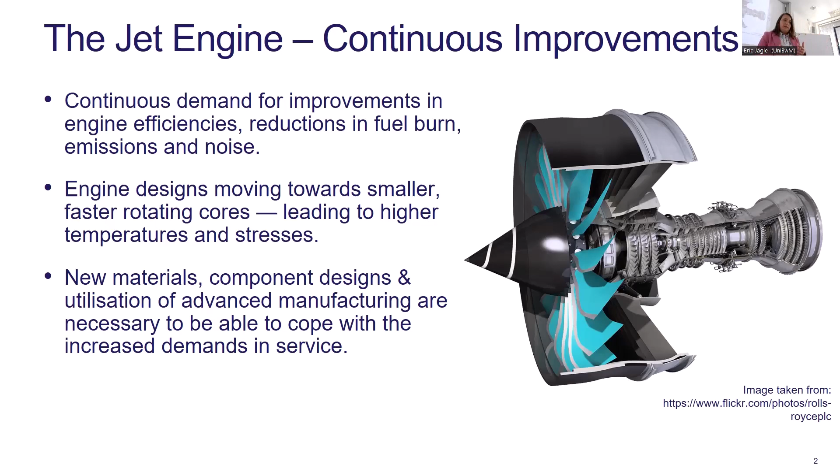And if we look at a quick cross-section of the jet engine and where the different materials are being used, this is about 20 years old, and you'll see at the front of the engine, we have quite a lot of titanium. It's nice and light, we like it, but it doesn't have the temperature capability. So as we move through the engine to the higher temperatures, we increase the amount of nickel that we use. So the new concepts of engines that we're looking at now have that nickel-based superalloy red section coming further and further front, right, as the temperatures are increasing.

And that is both good and bad. It means we need to completely change the makeup of the engine, it makes it a lot heavier. We're looking at increasingly more complex chemistries of nickel-based superalloys. So if we can use manufacturing to help us semi-artificially reduce those temperatures in the component, we can create a better makeup for the engine in terms of lightweighting and the complexity of the chemistries that we're looking at.

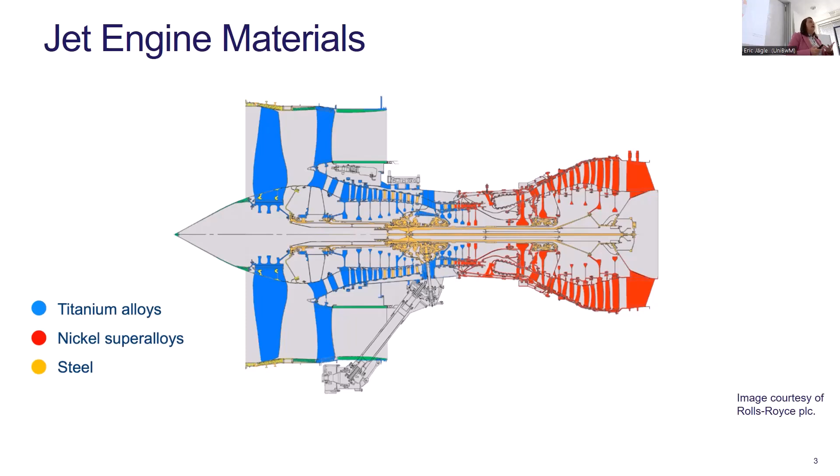So very briefly, nickel-based superalloys, if you're not familiar, primarily consist of two phases. The gamma phase matrix, which is an FCC nickel-based solid solution. We like it, it's nice and ductile. It has low rates of self-diffusion, so its creep is quite good. It has good solubility for lots of different elements, so we can tailor it quite nicely. But we can supercharge those properties by using the precipitation of the L12 gamma prime phase, which is a Ni3Al ordered intermetallic. And using that, we can increase the temperature capability and mechanical performance significantly.

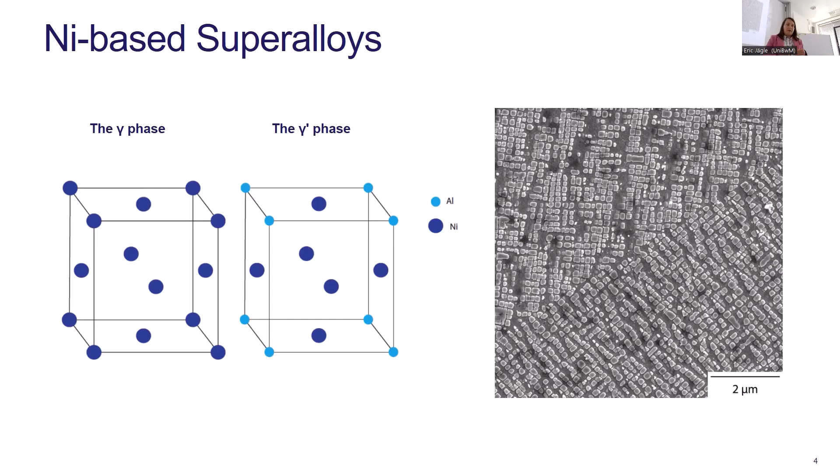Now, what does that mean in terms of additive in aerospace propulsion? As I said, if we can use advanced manufacturing, we can access much more complex geometries. We can introduce much more complex cooling than we were able to with alternative methods. We can reduce the number of parts that we need and the joining and fastening, and we can reduce the lead times for component manufacturing since we don't need as much post-processing.

But when we start thinking about the material that we're using in that, nickel-based superalloys are particularly problematic in that the higher the volume fraction of the gamma prime, which is the strengthening precipitate, so what we use for the mechanical performance and the temperature capability, the worse it is for additive manufacturing.

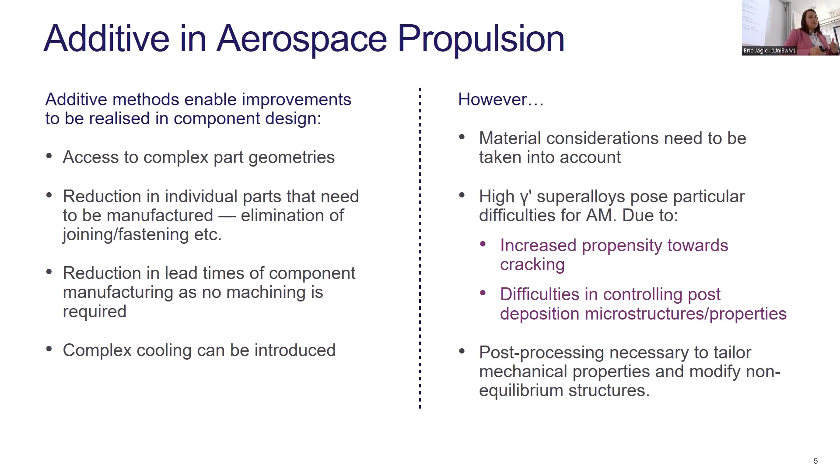So we have increased propensity towards cracking, and we find difficulties in controlling the microstructure the higher the gamma prime content as well. But post-processing is necessary to tailor the mechanical properties and modify those non-equilibrium structures as well. So there's a lot of challenges still, and the more materials we look at, the more challenging it gets.

So in this particular work, we were looking at Haynes 282. This was an alloy that was developed for a combination of good creep resistance, thermal stability, and weldability for applications in a range of temperatures from 650 to about 930. And one of the reasons that we were interested in Haynes 282 is that it has a fairly large range of temperature capabilities at a fairly controlled and low fraction of gamma prime.

So our gamma prime fraction is controlled to about 20 to 30%, and the microstructure is optimized through heat treatment. So traditional cast and wrought Haynes 282 uses a super solvus homogenization at about 1150 degrees Celsius, followed by 1010 degrees Celsius for 2 hours to precipitate the M23C6 carbides at the grain boundaries, and then 788 degrees for 8 hours to optimize the gamma prime distribution. So quite a complex post-processing heat treatment for a nickel-based superalloy.

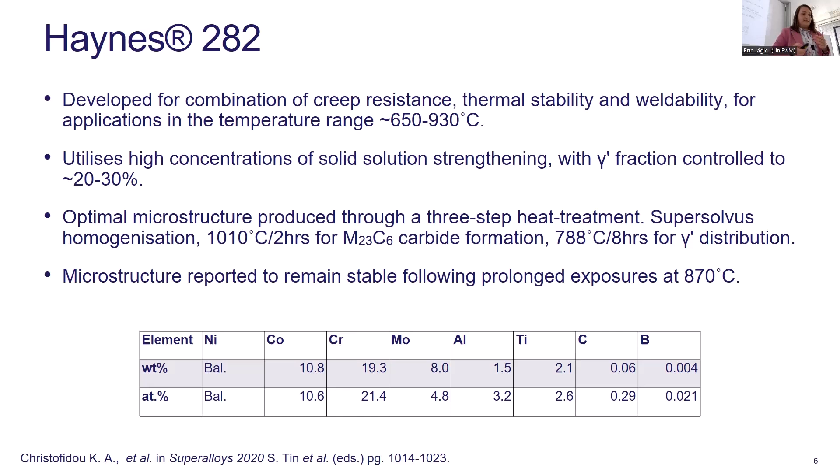And the microstructure is actually quite stable. So we don't see the formation of deleterious phases like TCP phases or excessive growth of the gamma prime either at temperatures over 870. And really looking at the composition of the material, it's quite remarkable that it doesn't do that. When I first looked at it, I was convinced it was going to be horrendous for stability, but it isn't. It's beautiful.

So in terms of additive manufacturing of this material, at the time we were doing this study, there was very little on the additive manufacturing of Haynes 282. It was primarily just a few studies using electron beam melting. Since then, there's been a few more, but I'm bound by industrial clearance processes, which means that I can't update slides very easily. So we're sticking to the few studies that were available at the time.

And one of the key things that was identified was that the microstructures, but particularly the carbide distributions, were quite different from the cast and wrought to the additively manufactured component. So one of the key things was the MC carbide and the M23C6 and where and how it precipitates through the material. So in this study that I've included here by Unocic, we've got a couple of different heat treatments.

On the left is the two-step aging that's recommended by Haynes, which results in some large titanium-rich MC carbides with M23C6 at the grain boundaries. And what they were looking at was how they can influence that or achieve that without having the multiple steps. And what they found was actually they can just create a very similar microstructure with just 4 hours at 800 degrees Celsius.

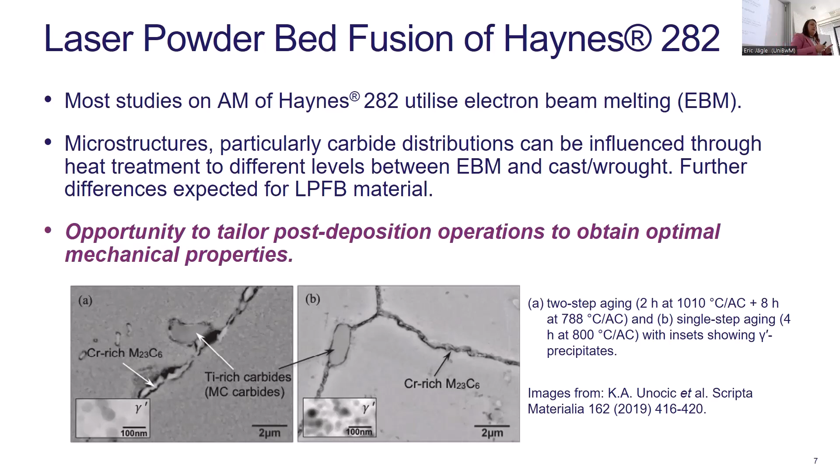So that suddenly changes a lot of the dynamics of our microstructural optimization. So that gives us an opportunity to actually tailor the microstructures using post-deposition operations to obtain optimal mechanical properties, rather than just looking at the build alone.

So what we did, we built a bunch of Haynes 282 samples using an EOS M280 instrument from virgin powder up to sizes of 45 microns. The build parameters were kept constant for the samples, but I can't share them. Even if I wanted to, I don't actually know them. I was bound by this confidentiality again.

So we had a few different coupons. So we built 30 by 30 millimeter squares by 1 millimeter thick samples that we did the microstructural characterization on. And then we had small bow tie specimens that had a 1 by 1 millimeter squared cross section by 20 millimeters sort of gauge length.

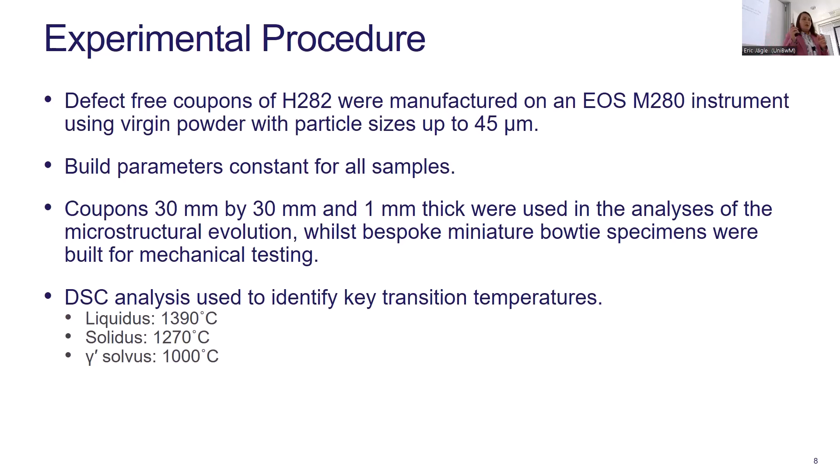So we're looking at equivalent microstructures in terms of thickness to what we're testing. We did some DSC analysis to help us identify some of the key transition temperatures for the material and then design our heat treatments from there. So the liquidus of the material was about 1390, the solidus 1270, and the gamma prime solvus was at about 1000 degrees Celsius, which helps just pinpoint a few things.

So the first couple of heat treatments were what we call the industrial ones. So we sandblasted the samples. This seems to be a standard thing for the surface finish for this particular application. And then we had the 1150 degrees Celsius for 1 hour solution heat treatment or homogenization heat treatment. So the first heat treatment is just that, just the solution, and then we have the two-step aging attached to that for the second one.

The rest of the heat treatments were lab-based ones, so we encapsulated all the samples in quartz tubes, and we heat treated them in lab furnaces under a range of different conditions. So you'll notice that we have a much higher solution heat treatment, and we played around a little bit with the solution heat treatment, and I'll come to that in a second why.

The other thing that we did was look at the intermediate aging step. So the current Haynes 282 recommended for cast and wrought is super solvus, super gamma prime solvus, whereas we looked at a couple of heat treatments sub-solvus to see what that would do to the material and its properties. And then we kept the gamma prime optimization to 788, just because that seems to work quite well anyway.

We did some microstructural characterization after each of these steps, and we did the mechanical testing on an electrothermal mechanical testing machine. Effectively, we tested tensile at 900 degrees Celsius at 10 to the -5 strain rates, and we did some creep testing that we tried to get about 100 hours lifetime from, so we were using data from the existing literature. So that was 900 degrees Celsius at 120 MPa.

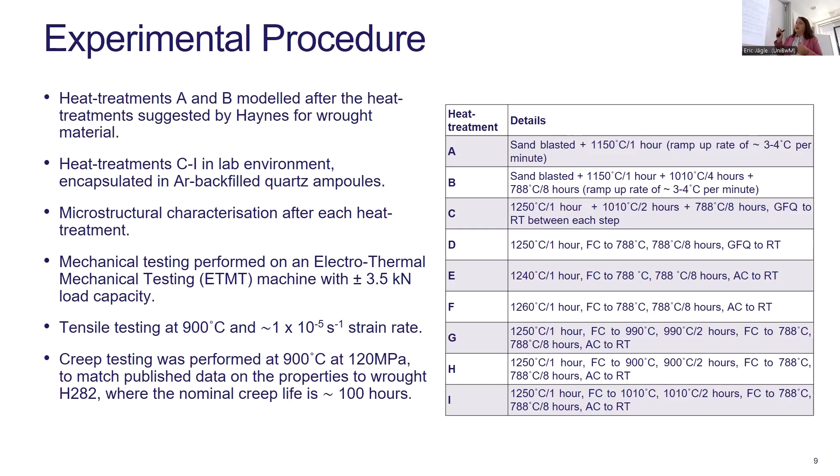So looking at the microstructure to begin with, if we concentrate on the first row of microstructures, the first thing to notice is that the conventional wrought heat treatment doesn't actually lead to recrystallization. We keep the highly misoriented cellular structures that we might expect from the deposition. We don't see much difference from the as deposited to the solution heat treated. We can start seeing the precipitation of the M6C carbide, just tiny little black dots at the grain boundaries.

And then following the two-step aging, what we see is M6C, the bright phase there along the grain boundaries is a molybdenum-rich M6C carbide. And in between that, we've got M23C6. Importantly, we don't see any MC carbides, so no MC or carbonitrides of any sort, monocarbonitrides of any sort, which is quite common in both the E-beam material and the wrought material.

The second thing to notice is the recrystallization. So as I said, in the traditional 1150 degrees Celsius homogenization, we don't get recrystallization. So we played around with the temperatures for the recrystallization to see when we would actually induce it, because that was quite an important factor for us. And what we found was that recrystallization needed an hour at 1250 or a couple of hours at 1240. And we looked at different compositions for that, with different durations for that as well.

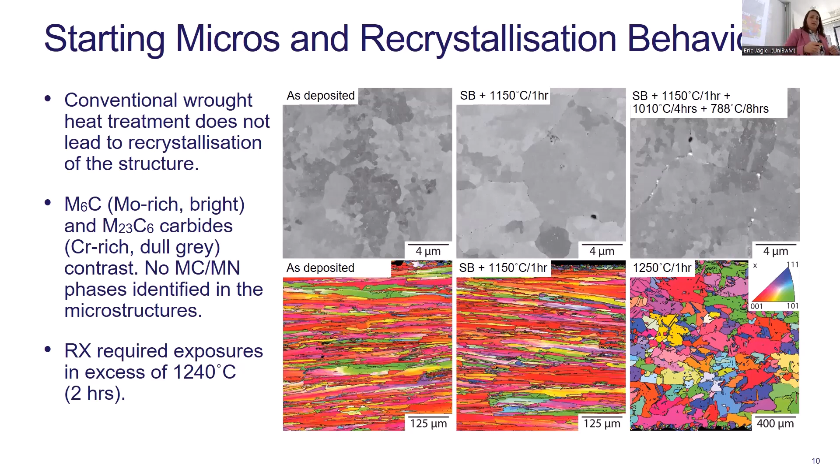So the main thing was that we were looking at recrystallized material before we were looking at the intergranular microstructures. So I'm going to ignore the first two that didn't recrystallize for the rest of the talk. I'm just going to concentrate on the microstructures of the rest.

So the first heat treatment C, which was basically recrystallized, the two-step aging as normal, and then gas fan quench, so quick quenching from temperature. You can see a very, very fine structure for the gamma prime, and then we have carbides along the grain boundaries. So that was the one that was mainly different, just because it was the only one that we quickly cooled. Everything else has equivalent furnace cools.

So we see the carbides precipitating in very similar structures. So we don't see a huge difference in morphology for the carbide species, but the carbide species are M23C6 and M6C. We don't see anything else coming out in any of them. The key difference that we see is the tertiary gamma prime. So if you look at probably this third one here and the fourth one there, you can see around the grain boundary, we have the tertiary gamma prime coming out.

Yeah. So the only two heat treatment conditions that we didn't have it were the ones where we had the second heat treatment stage subsolvus to the gamma prime. So you can see in this one, for example, growing of the gamma prime around the grain boundary, but a distinct lack of tertiary gamma prime coming out. And the reason we wanted to have that was later on when we were testing the creep, to see if that had any effect on the properties.

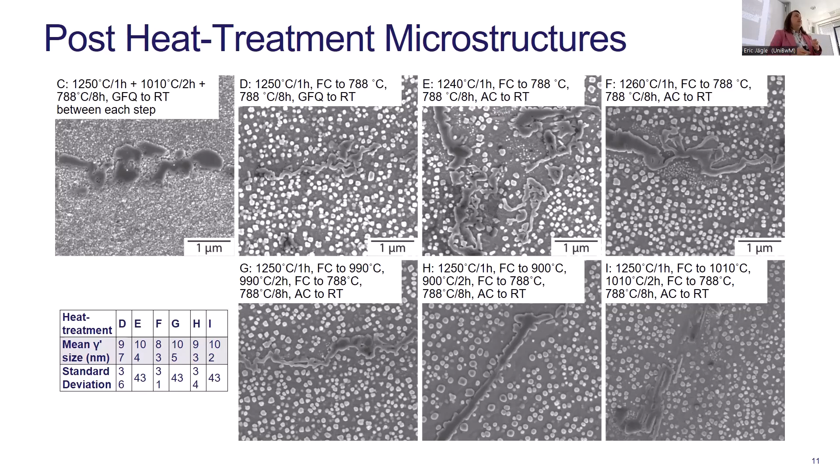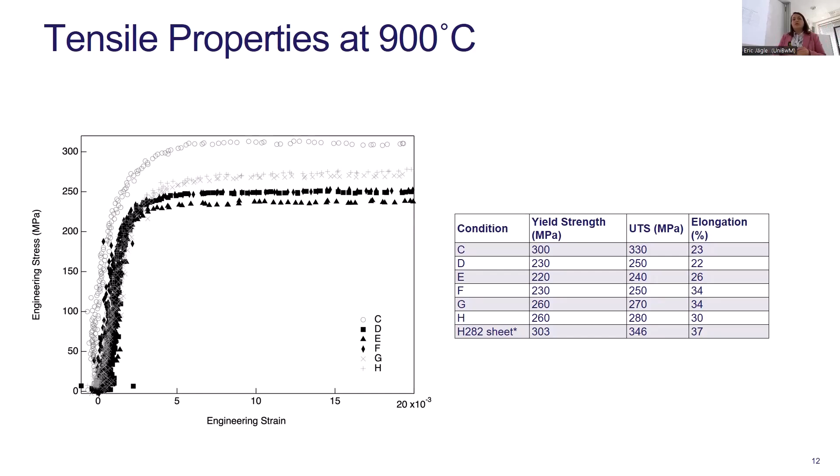So tensile properties at 900 degrees Celsius: apart from the one that we quickly cooled, which gave us a much finer gamma prime distribution, everything else is within error. So everything is equivalent. The elongation, you can ignore. The electrothermomechanical testing is very bad for elongation. The main thing I included it for is just to say it's not brittle. So it has quite a fair amount of ductility after all of these heat treatments. So there isn't a massive debit on the ductility even at temperature.

Now, the more interesting results came from the creep. In the tensile, we didn't really see any changes, and we weren't expecting massive differences. That was sort of logical. The creep, we were expecting to see a lot more differences, but they didn't really correlate very well. So we didn't manage to get good data from some of the conditions. Condition C here looks okay, but it doesn't stick out. So the gamma prime distribution didn't seem to necessarily influence the creep performance. The finer gamma prime seems to be equivalent to the larger gamma prime as well.

Condition C, D, and H, so the blue and green lines in there, are all about the same. And it kind of shows you the variation in the method that we use to test the creep. We've got about 30% variation in the methodology itself. So we get lives of 70 to 130 hours, right? We were aiming for about 100 hours, so we are within that range, which is great.

The two that stick out considerably as being very, very bad are E and G. They had creep lives of 30 hours. So even with a 30% issue, we wouldn't get much higher than that, or even close to what we were looking at. And the post-mortem analysis that we did on the fracture surfaces didn't actually show any oxidation to suggest that that was the reason for the bad creep performance. And there wasn't any correlation in the end with the tertiary gamma prime at the grain boundaries.

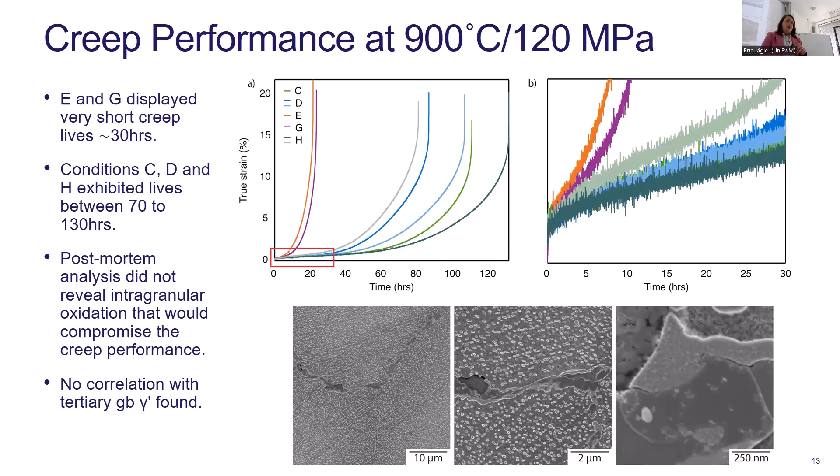We also did a quick long duration stability study that didn't really show anything. It just changed the morphology of the carbides, confirming that they stay as M6C and M23C6, nothing else. The gamma prime grew a little bit, up to about 150 to 200 nanometres.